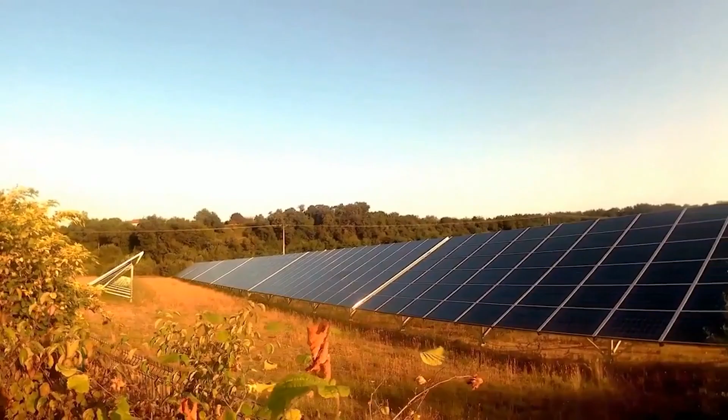My dear students, whomsoever is listening to this lecture, I am going to talk about emerging technologies in renewable energy sources, basic and early design of solar distillation. This is part 1 of emerging technologies. I am Dr. Anil Kumar Tiwari from the Department of Mechanical Engineering, National Institute of Technology, Raipur, Chhattisgarh.

My area of working is solar thermal applications. The possible renewable sources are solar energy, wind energy, hydropower energy, biomass energy, and geothermal energy, in which my lecture is confined to the recent trends of energy savings by solar thermal different applications.

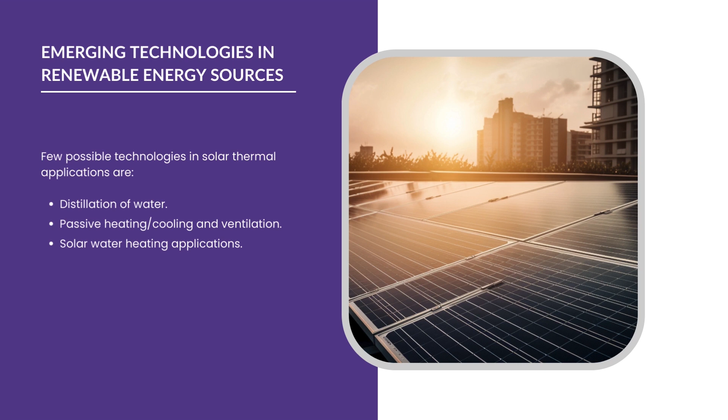The possible technologies in solar thermal applications are distillation of water for purification using solar energy, active or passive techniques, or by humidification and dehumidification. For building heating, cooling, and ventilation induced by solar energy using trombe wall, solar metallic wall, solar chimney, transpired wall, etc. Solar water heating applications as well.

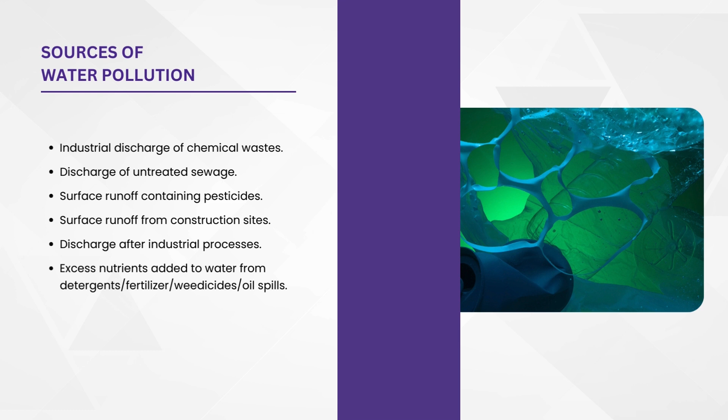Industrial discharge of chemical wastes and byproduct is one of the sources of water pollution. Another is discharge of poorly treated or untreated sewage. The third is surface runoff containing pesticides. The fourth is surface runoff from construction sites and farms. The fifth is discharge of contaminated water used for industrial processes. And the sixth is excess nutrients added by detergent or fertilizers.

The effects of water pollution are normally infectious. There are various waterborne diseases. Bacterial infection leads to typhoid, cholera, paratyphoid, and bacillary dysentery. Viral infection normally induces infectious hepatitis, known as jaundice, and protozoal infections are amoebic dysentery, etc. The need of drinking water.

Our Mother Earth has plenty of water, but limited resources of fresh water is there. 1.8 billion people will suffer from water shortage by 2025. Economic growth is the most important driver of future water scarcity. Water saving and desalination are the tools to face the water crisis.

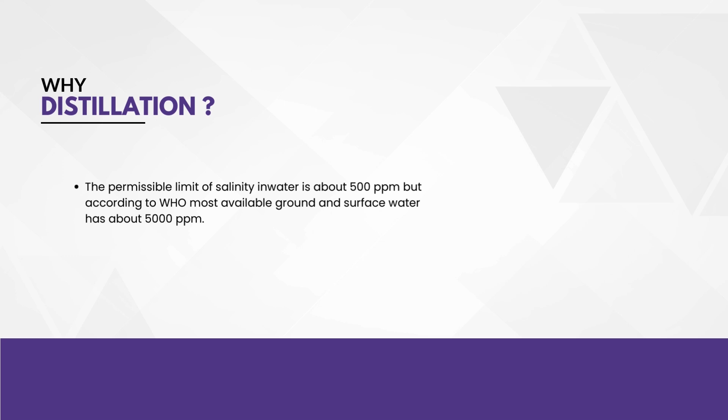Now, why distillation? The permissible limit of salinity in water is 500 ppm, sometimes 1000 ppm for special cases, according to the World Health Organization. While most available ground and surface water has 5000 ppm or even more salinity available to us. One of the methods to reduce salinity is distillation.

Water purification can be achieved through various techniques. Essentially, there are three primary methods for producing safe drinking water. Number one is membrane technologies - we use in our home, the RO system is the same. Number two is the distillation process. Number three is chemical approaches.

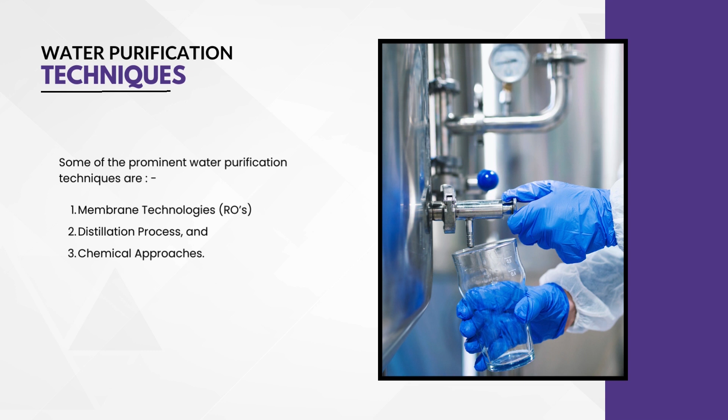Solar distillation method is an easy, small scale and cost-effective technique of providing safe water at homes or in small communities. It is one of many processes that can be used for water purification. The process requires energy input as heat, and solar radiation can be one source of heat energy. When water is heated by solar radiation it turns into vapor, leaving salt behind, and when the surrounding air cools, leading to condensation, the resulting water droplets collected are our distilled water.

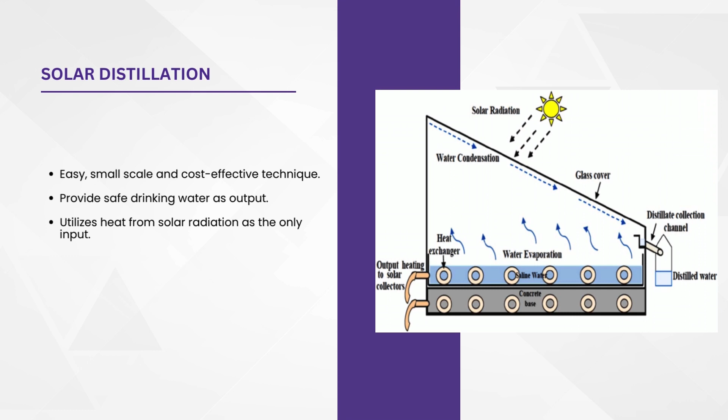The process of getting fresh water from saline or brackish water is distillation, and using solar energy for the same is solar distillation, which is done easily and economically.

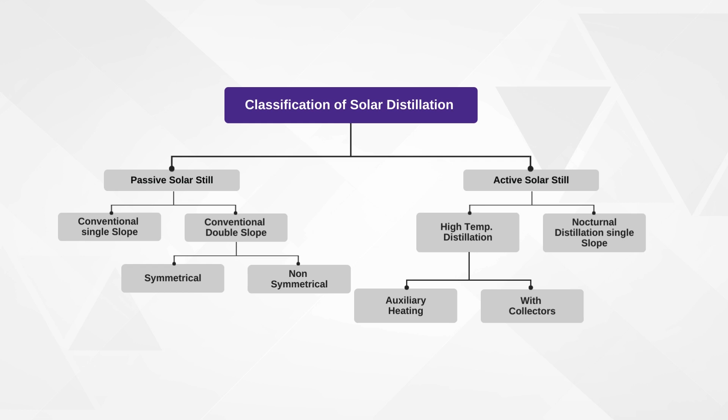As far as classification of solar distillation is concerned, it is of two types: passive solar still and active solar still. In case of passive solar stills, there are two classifications: conventional single slope or conventional double slope. In case of active solar still, there are two classifications: high temperature distillation or nocturnal distillation single slope. Conventional double slope can be either symmetrical or non-symmetrical, whereas high temperature distillation can be either auxiliary heating or using collectors for heating purpose.

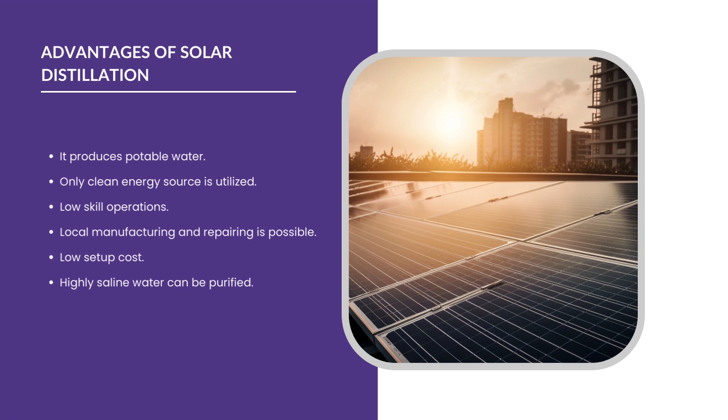The advantages of solar distillation: it produces pure water, no conventional energy source is required, no skilled operator is required to run the unit, local manufacturing and repairing is possible, low investment is required, and it can purify highly saline water even.

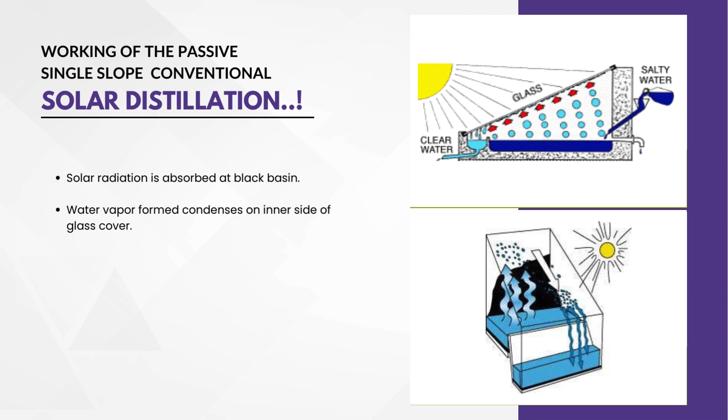Solar radiation is absorbed primarily by the black basin and is then converted into thermal energy. Water vapor condenses on the inner side of the glass cover, and the distillate flows by gravity into the water collection tray. The distilled water subsequently flows into the freshwater tank via a drain tube. This is how we collect the distilled water.

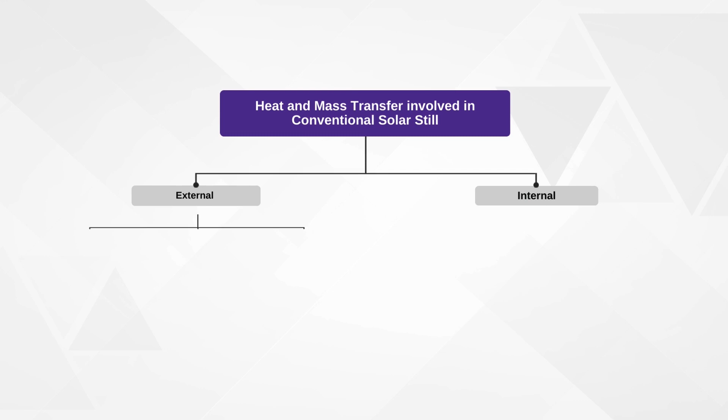Now, there are heat and mass transfer processes involved within the solar still, which make it possible to collect the distillate output. There are two types of heat transfer.

One is external, from outside the distillation unit to the atmosphere, and one is internal. As far as external heat transfer is concerned, there is conduction from basin to ambient, convection from glass to ambient, and radiation from glass to ambient.

As far as internal heat transfer is concerned, there is evaporation of water from basin to glass, convection heat transfer from water to glass, and radiative heat transfer from water to glass.

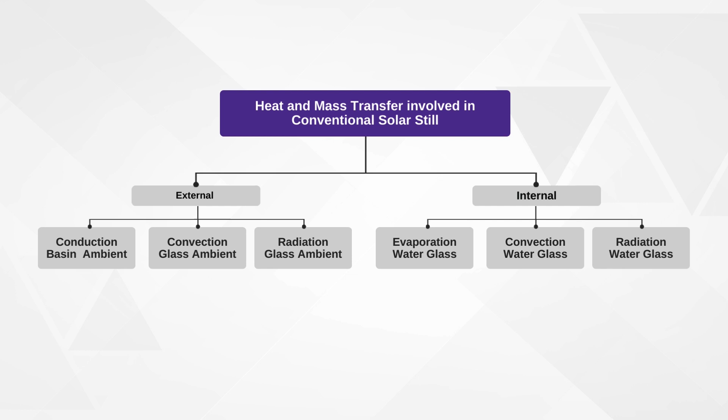Internal heat transfer is mainly responsible for the transfer of water from basin to glass. External heat transfer is responsible for heat loss from the glass, cooling the glass so that the water vapor inside can condense.

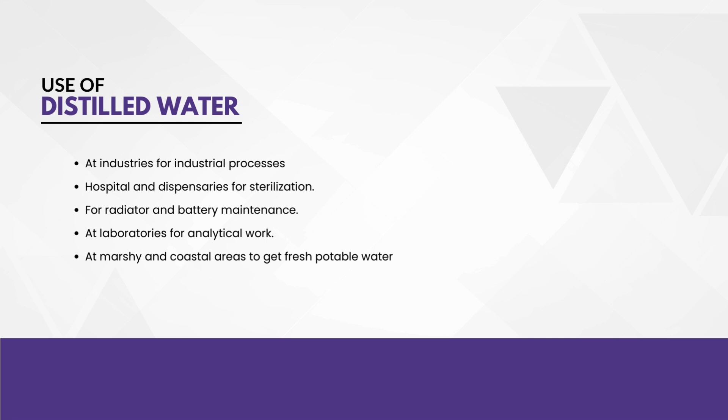Uses of distilled water include industrial processes, hospitals and dispensaries for sterilization, radiator and battery maintenance, laboratory analytical work, and drinking purposes in marshy and coastal areas to get fresh potable water for survival in the community.

Now, the drawbacks of solar distillation. Low production output is one drawback, approximately 2 to 3 liters per square meter per day under hot weather conditions. For more output, a larger still area is required, and it is also weather dependent.

If the weather is not favorable, there is a risk of not getting the yield. If the weather is very bad, there is a risk of the solar still getting damaged.

The third drawback is the effect of meteorological parameters, the total dependency on meteorological conditions. The output of solar distillation is highly affected by climatic parameters such as solar radiation, ambient temperature, and wind velocity. The output is more in hot climates compared to cold climates.

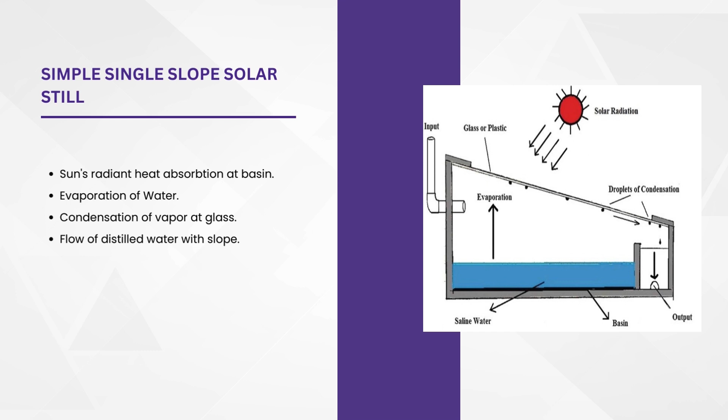The glass is at a lower temperature compared to the water, as seen at the glass inner surface. As a result, it accumulates as distilled water, and this process effectively separates the water vapor from any dissolved impurities or substances. The condensed water emerges as pure, distilled water.

The primary determinant influencing the yield obtained from a solar still is the temperature difference between the water in the basin and the glass cover. Normally, it is expressed as Tw minus Tg, where Tw stands for temperature of water and Tg stands for temperature of glass. The greater this temperature difference, the greater the result, as an increased distillate output.

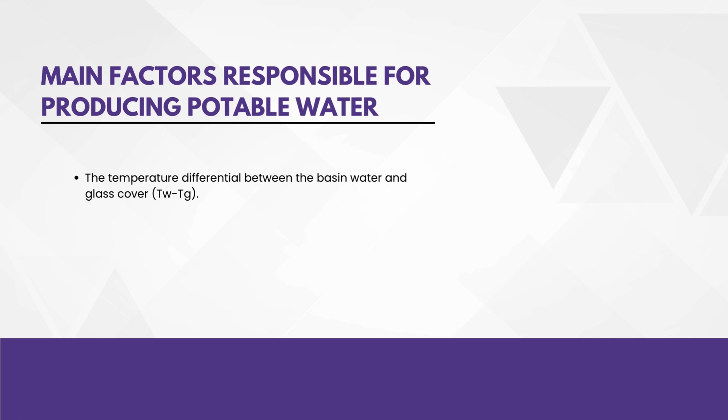There are two types of solar still, as I have told you earlier as well. Passive solar stills, in which solar thermal energy directly heats the water in the basin. In active solar stills, the solar energy does not directly heat the water in the basin; instead, some other arrangement is made where additional energy from other sources is needed, in addition to the solar energy received in the basin.

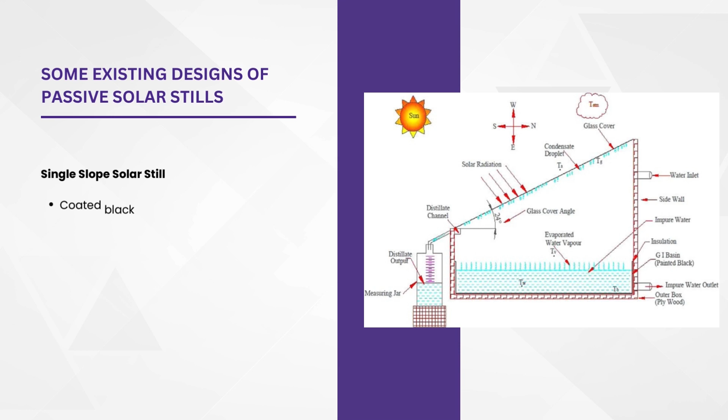As in the case of a single slope solar still, the construction is a straightforward, simple process. It involves assembling a fiber reinforced plastic, normally called FRP, body for maintaining good insulation, with an inner surface coated with black paint, capped by a transparent glass top cover, which permits solar radiation to get in and also provides an enclosure so the vapor cannot escape.

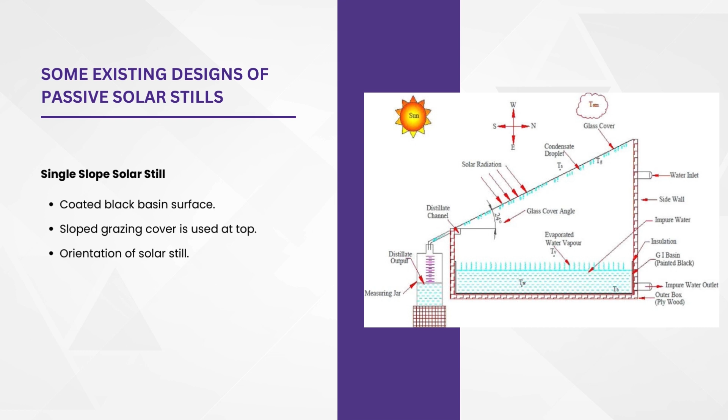The optimum orientation of the solar still is crucial to harness the highest amount of solar radiation, typically aligning its inclination with the latitude of the specific location where the solar radiation is likely to be captured.

In case of double slope solar still, when single slope solar still faces a certain direction, normally south for countries on the northern hemisphere like India, double slope solar still is kept in east-west direction to receive solar energy throughout the day. As seen in the figure, it is kept on east and west direction. The working is same as of single slope solar still.

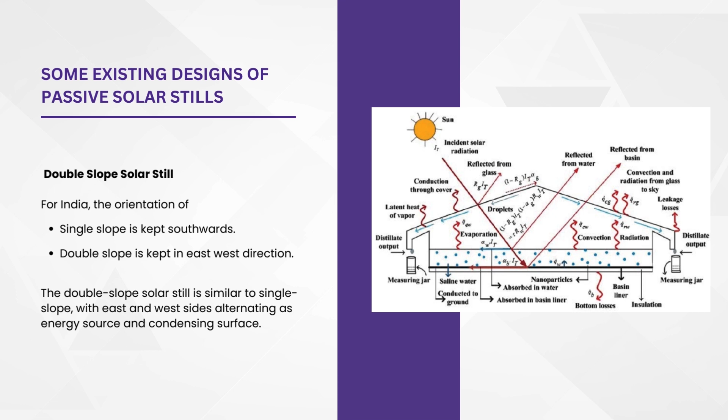In double slope solar still, when the east side acts as a source of solar energy input, the west side acts as a condensing surface in morning hours, and vice versa in the evening. In winter, the single slope FRP still gives better yield than double slope stills, but in summer the double slope stills give better yield than the single still.

As far as annual production is concerned, the double slope is better. In summer, the path of the sun is almost overhead, unlike winter, when the path of the sun is declined to the south direction. Therefore, in summer, the double slope is better.

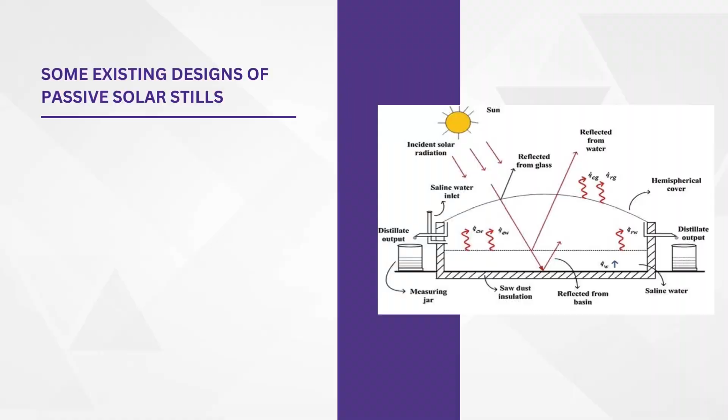Another type of solar still is the hemispherical solar still, where the radiation permitting cover has a hemispherical shape. It is a remarkable innovation in the field of solar distillation and water purification. Its design mimics the shape of a half sphere, which makes it aesthetically unique and also highly efficient in harnessing solar energy.

This ingenious device consists of a curved concave basin with a transparent cover. The basin is usually coated with a dark heat absorbing material to accelerate the water heating process.

Here is how it works. As the sun's rays penetrate the transparent cover, they heat the water within the basin. This heat causes the water to evaporate, leaving impurities and contaminants behind. The vapor then condenses on the inner surface of the cover and collects as pure distilled water. This process effectively separates fresh water from dissolved solids, making it valuable where clean drinking water is scarce.

Hemispherical solar stills are particularly efficient because of their unique shape, which allows for maximum exposure to sunlight, whatsoever the path of the sun, whatsoever the season, throughout the day and throughout the year. They are a sustainable and eco-friendly solution for addressing water scarcity in arid regions, offering a simple yet effective way to obtain clean and safe drinking water from readily available solar energy.

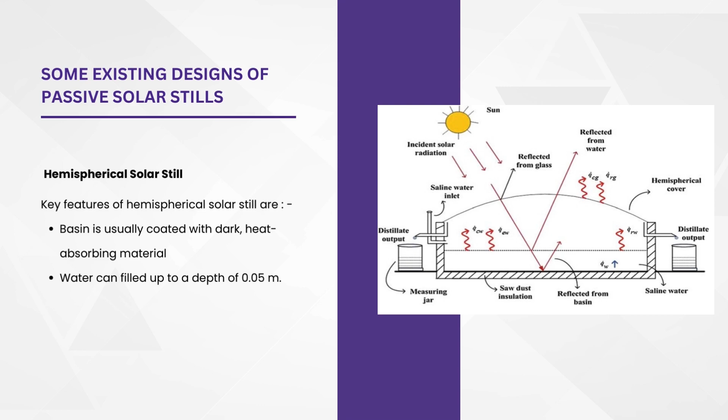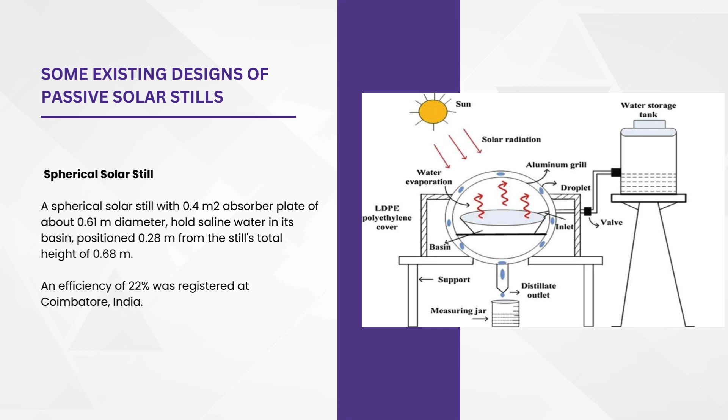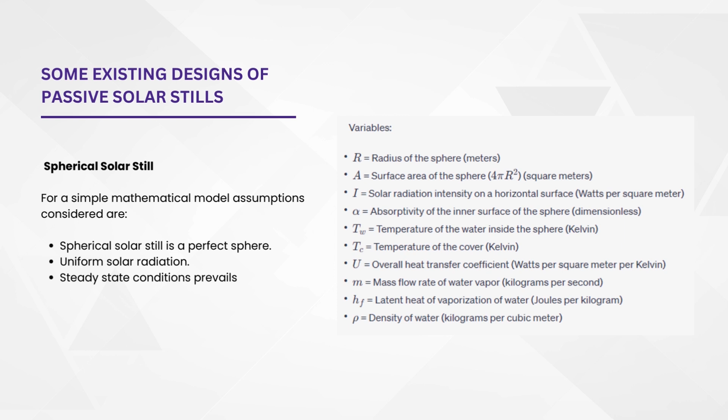Capital U is the overall heat transfer coefficient in watts per square meter per Kelvin, and m is the mass flow rate of water vapor in kilogram per second, whereas Hf is the latent heat of vaporization of water in joules per kilogram, and rho is the density of water in kilograms per cubic meter.

Energy balance: the energy balance for the spherical solar still can be expressed as I, the solar insolation, into capital A, the area receiving the solar radiation, into alpha, the absorptivity of the surface absorbing the solar insolation, which is equal to U, the overall heat transfer coefficient, into A, the area receiving the solar radiation, into the temperature difference of water to cover.

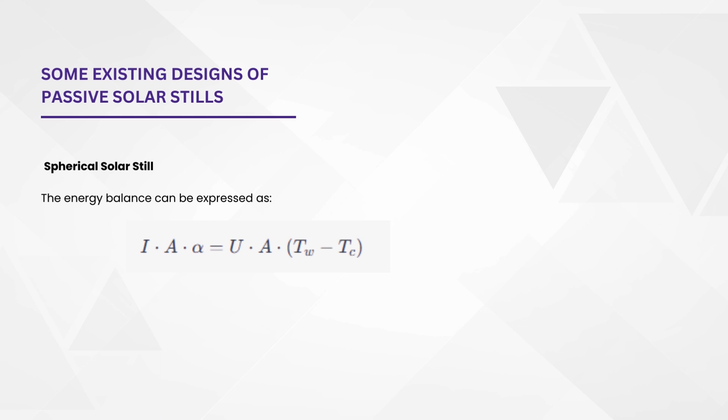The mass balance for the spherical solar still can be expressed as m equals rho into area into heat transfer coefficient into temperature difference, upon the latent heat of vaporization. This equation represents the rate at which water evaporates from the surface of the water inside the sphere.

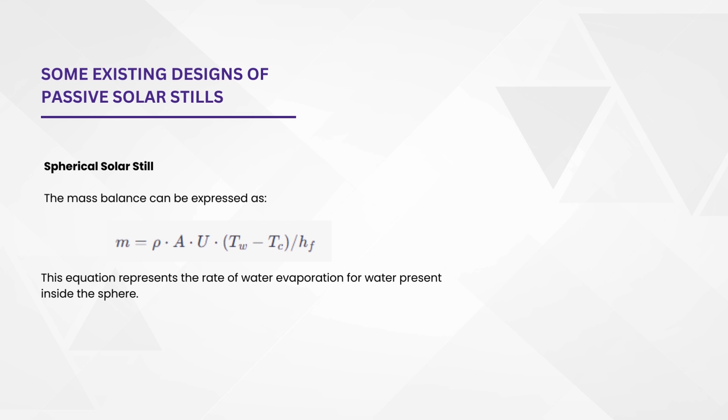There can be triangular pyramid solar stills, which if you see and watch precisely, you will find that the area increases in case of triangular pyramid solar still. In pyramid solar still, the top cover is in the shape of a pyramid, triangular pyramid, or it can be a square pyramid as well. The major advantage of pyramid solar still over conventional single slope solar stills is...

In a conventional solar still, the still must be positioned so that its inclined surface directly faces the sun and needs continuous adjustment as the sun moves across the sky to capture maximum solar radiation throughout the day. Conversely, in case of a pyramid solar still, such adjustments are not required.

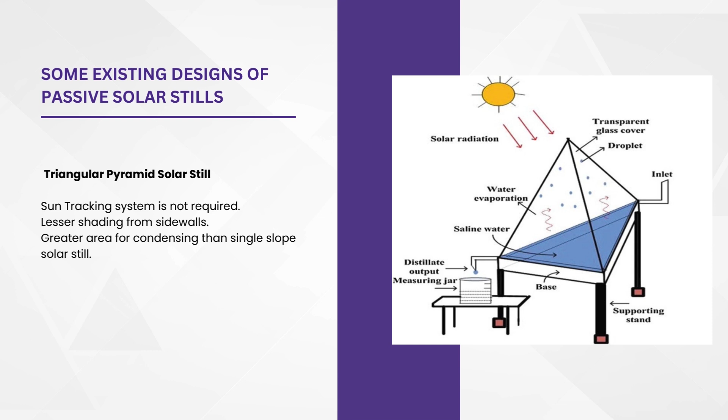Compared to the single slope solar still, the pyramid shaped solar still experiences less shading of its side walls on the water surface, which reduces the obstruction of solar radiation. Consequently, for the same basin area, condensation in the pyramid shaped solar still is higher, as the condensing area in the pyramid shape is greater. This presents an additional advantage.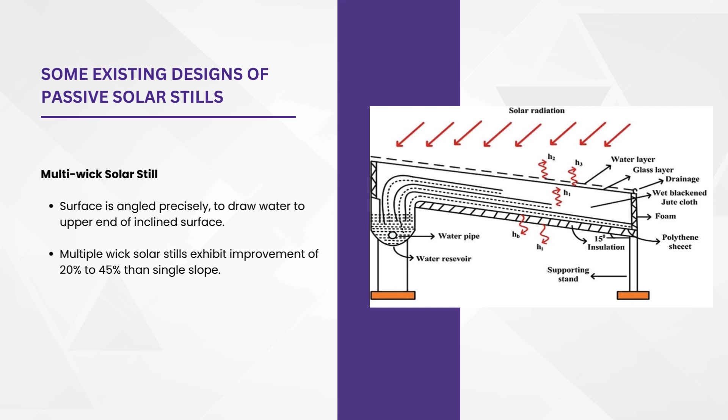Multi-wick solar stills exhibit superior performance and are cost effective to construct, resulting in an improvement of 20% to 45% compared to single slope solar stills.

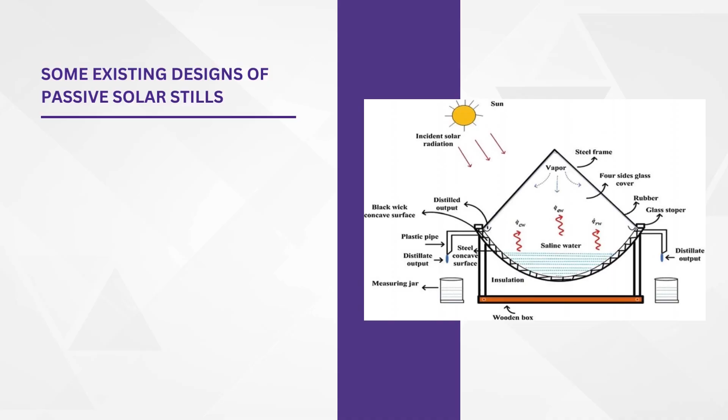Another one is the concave wick solar still, as the figure shows the shape of the concave basin. To enhance the performance of the wick-type solar still, the concave wick-type solar still has been introduced. The concave shaped wick basin effectively increases the surface area for evaporation.

The productivity or yield of the concave wick solar still reaches 4.1 liter per day per meter square. Furthermore, it has demonstrated an impressive maximum instantaneous system efficiency of 45% and a daily efficiency of 30%.

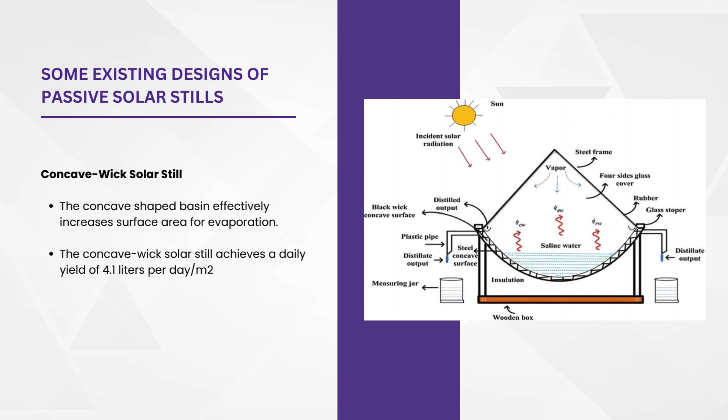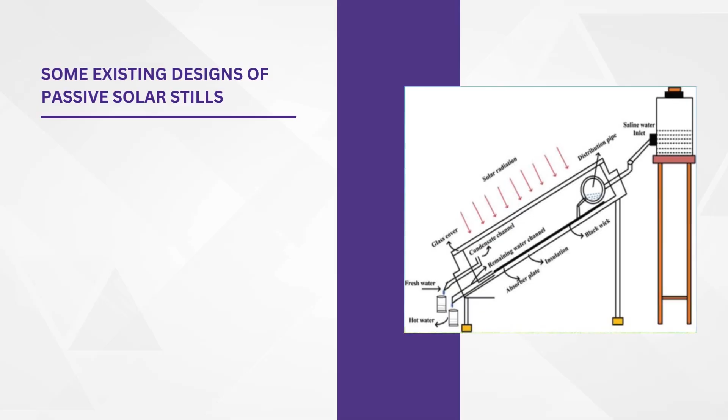Another improvement is the inclined wick type solar water distillation system. To ensure a consistent flow rate of water through the wick, the inclined wick type solar still has been introduced. This system can be adjusted to an optimum inclination angle to capture the maximum solar radiation.

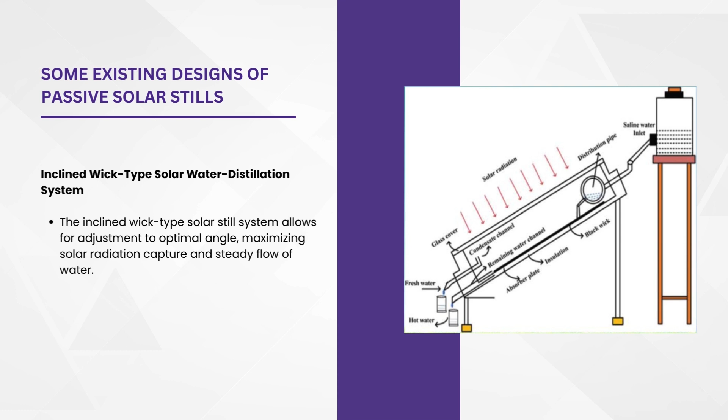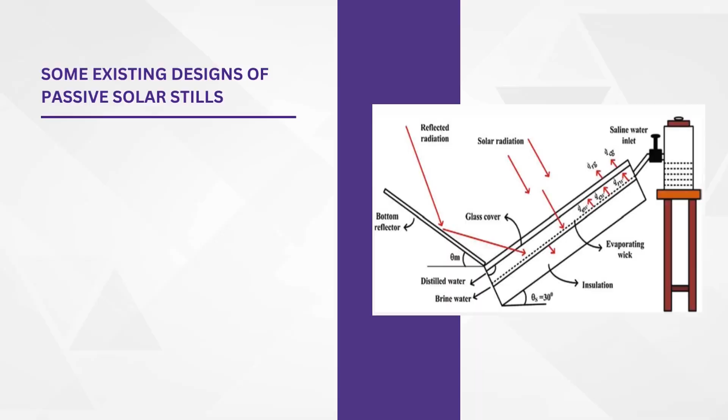When maintained at this optimum tilt angle, the performance of the inclined wick solar still surpasses that of traditional wick type solar stills. Tilted wick solar still with flat plate bottom reflector: the solar still comprises several key components - a transparent glass cover, bottom insulation, a flat plate bottom reflector, and an evaporative wick. The flat plate bottom reflector, crafted from highly reflective materials, extends from the lower edge of the solar still.

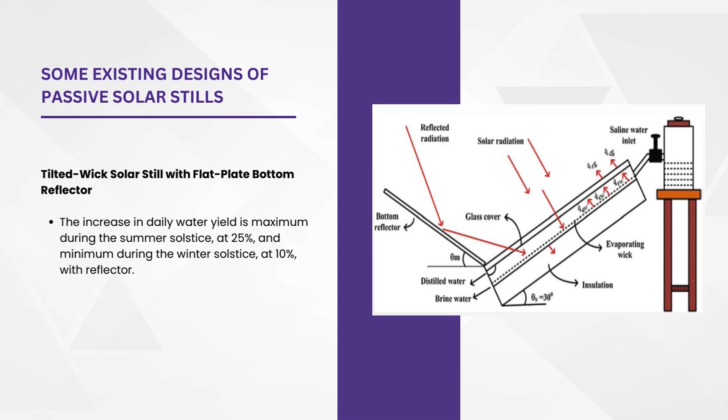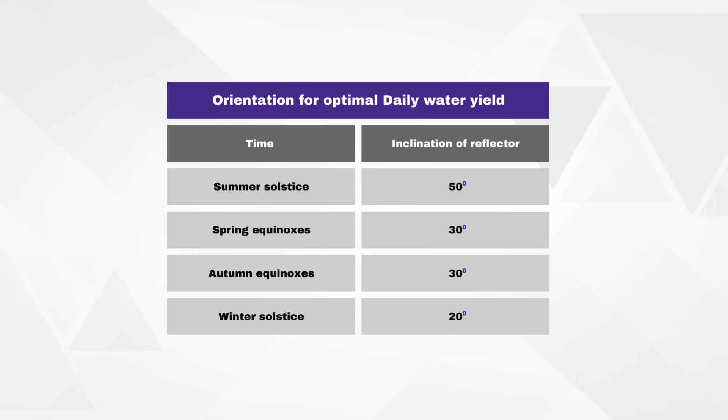Optimum daily water yield occurs under specific conditions: a reflector inclination of 50 degrees during the summer solstice, 30 degrees during the spring and autumn equinox, and 20 degrees on the winter solstice. The increase in daily water yield is most pronounced during the summer solstice at 25% and least during the winter solstice at 10%, when a bottom reflector is incorporated into the design.

When the reflector is inclined at 35 degrees, the average daily water yield over 4 days increases by approximately 13% compared to the conventional tilted wick solar still.

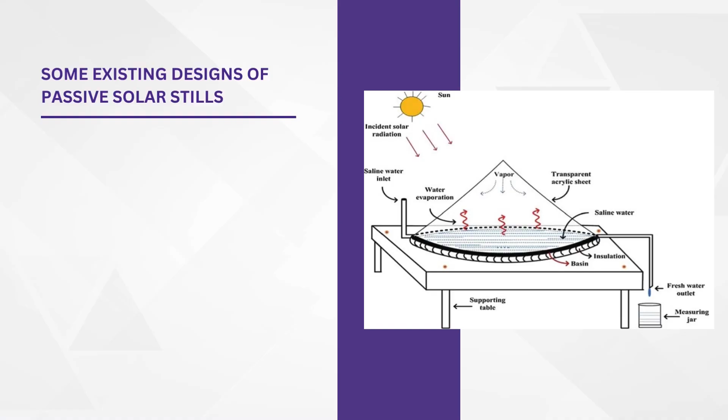Then there is a conical solar still. As can be seen by the shape, the solar still features a circular base made of galvanized iron measuring a typical dimension of 0.8 meters by 0.8 meters and a cone with a height of 33 centimeters. To enhance solar absorptivity, both the sides and the basin are covered with 0.7 mm thick galvanized iron to collect the distillate, which is painted black.

Additionally, a transparent acrylic cover with a thickness of 0.5 centimeter is securely affixed at a 31-degree angle along the circular side of the still. This cover allows solar radiation to reach the basin, serving as both a condensing surface for potable water and a means to harness solar energy simultaneously.

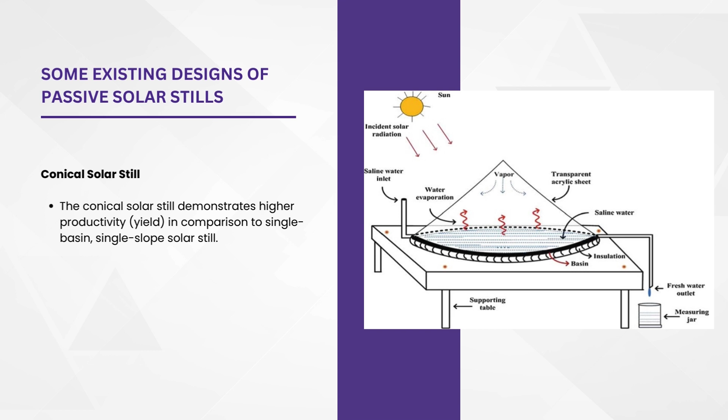This type of solar still is used inside the sea when a boat is far out at sea. It's worth noting that the conical solar still demonstrates higher productivity compared to the conventional single basin, single slope solar still. The conventional version has similar dimensions of 0.8 meters by 0.8 meters for the basin and features a depth ratio of 70 centimeters to 10 centimeters for the higher and lower walls respectively. For comparison, both the conical and conventional solar stills are constructed using the same material.

Another one is the active type: solar still coupled with a flat plate collector. A solar still coupled with a flat plate collector is a combination of two solar technologies - a solar still and a flat plate solar collector which heats up the water.

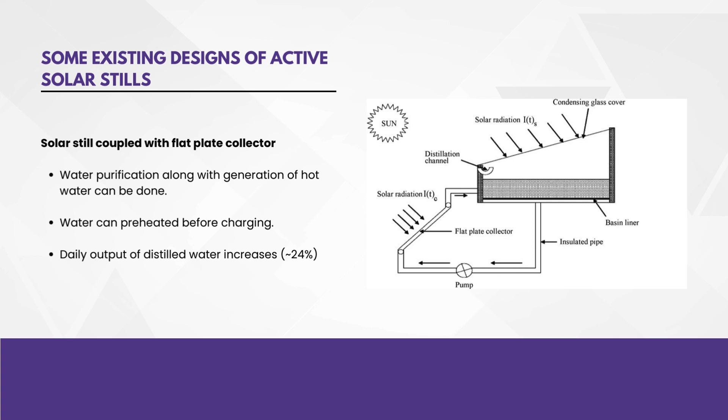This hybrid system is designed to harness solar energy for both water purification and generation of hot water as well. In this design, a solar distillation system is integrated with a flat plate collector to preheat the water before it enters the solar still, effectively expediting the evaporation and condensation process. As a result, the average daily output of distilled water has been determined to be 24% greater than that achieved by a basic single basin solar still.

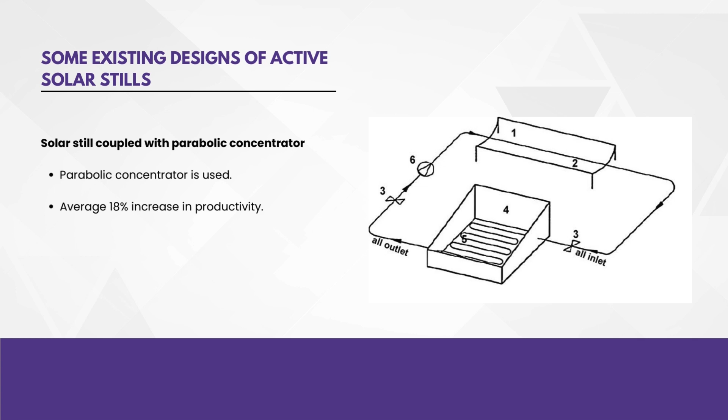Solar still coupled with a parabolic concentrator, the same case. In this design, the solar distillation system is coupled with a parabolic concentrator to heat the water prior to sending it to the solar still. Similar to the previous case, the productivity increased, averaging 18%.

Solar still coupled with an evacuated tube collector. All these examples are of active solar stills. Convection heat loss due to air movement inside the collector can be significantly reduced by maintaining a vacuum between the top glass cover and the absorber of a flat plate collector.

The optimum daily yield has been obtained as 3.9 kg, with energy and exergy efficiencies as 33.8% and 2.6% respectively, during a typical summer day for a typical dimension.

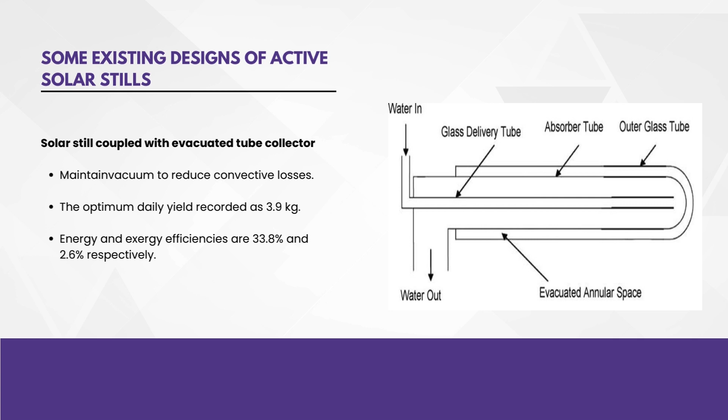The solar insolation received on the still's surface depends on factors like location, day, time of day, weather conditions, and the angle of the cover slope. It can be calculated using the formula: Q equals area multiplied by insolation multiplied by efficiency of the collector.